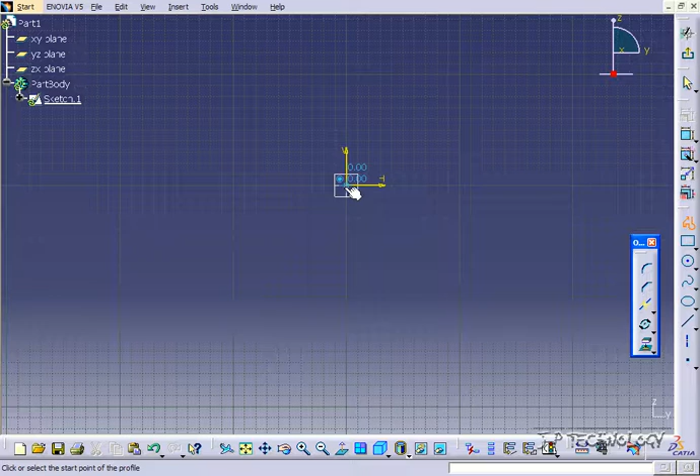Now I'm going to show you how to rotate your sketch within CATIA V5, and again, the reasoning behind this would be if you have a very complicated sketch and you need to rotate it a little bit, rather than redoing your entire sketch, you're able just to rotate it and shift it. So I'm going to draw out a profile. I'm just going to draw it out from the center point and just end it there.

To rotate, you'll find it in this toolbar along with the translate and the scale. You can also find it if you go to Insert, Operation, Transformation, and you'll find Rotate. With rotate, you're able to either select a single line or the entire sketch. What I'm going to do first is just do a single line. So let's click this line here and let's click rotate.

Now with rotate, again, you can make duplicate instances. So you can turn it on or off. In this case, we're going to make duplicate instances. So right now, let's just do one. What you have to do is select the origin where you're going to rotate around. In this case, we're going to use the origin of the sketch. So we'll click this point here.

And now you have to kind of just draw a line, and that's what it's prompting you to do. From this line, we're going to rotate around. The longer you make this line, the easier it is for you to manually move it around. The shorter it is, the harder it is to move it around, as it's going to be a lot quicker to change the value. So we'll make it just about the same length as the line we're going to rotate. And as you see, as we rotate, the part is also rotating.

So you're able to either rotate and snap to a point, or you can type in a value. This first one, let's snap it to a point. We'll snap it to this point here, and now we've duplicated that sketch there. Now press Ctrl Z, get rid of it, and we'll do another one. Click rotate, click that center point, go straight up, and this time let's key in 17 degrees. Click enter, and now it's moved 17 degrees.

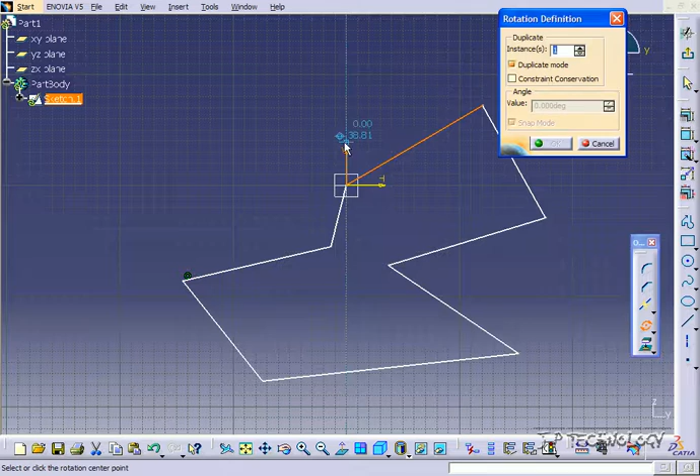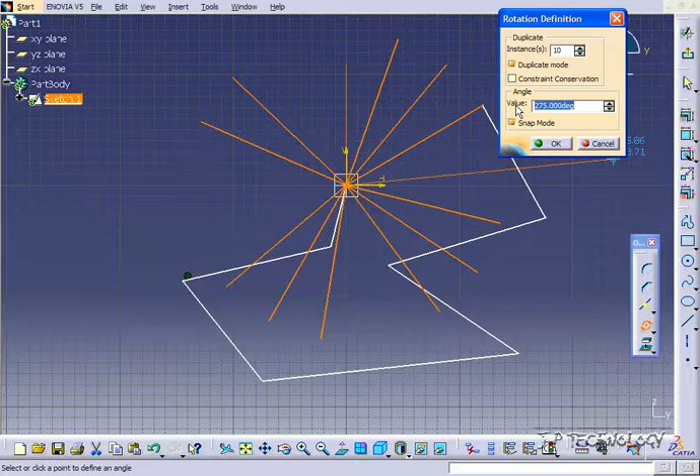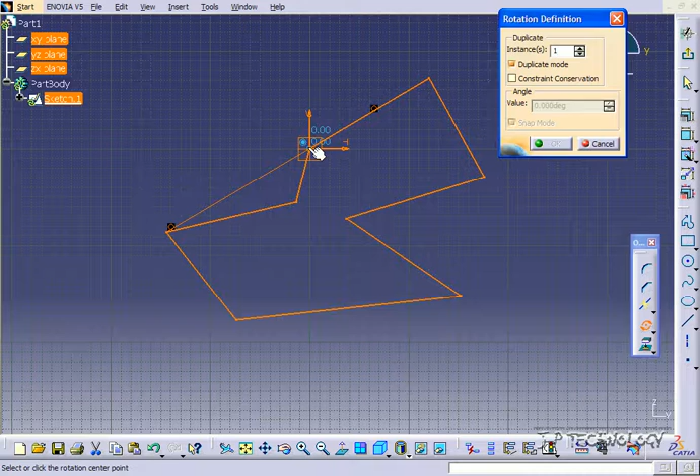Now we're going to rotate this entire sketch. So let's highlight the entire sketch, click rotate, and we're going to put it down to one instance. We're going to duplicate it, and we're going to do it around the center point. So bring it straight up, and we're able to rotate this around as such. Now let's put this to 90 degrees, click OK, and now we've rotated that entire sketch 90 degrees.

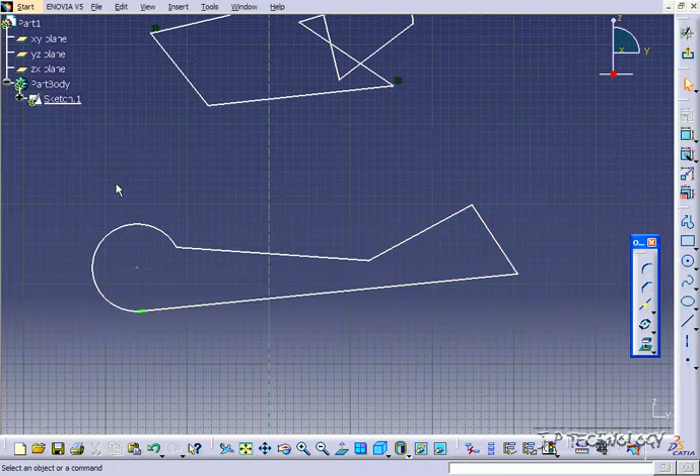Now let's draw another sketch down here. What we're going to do here is just rotate the sketch alone. So let's highlight the entire sketch, click rotate, and we're going to uncheck the duplicate. Now we're going to rotate it around this point here, and we're going to key in 90 degrees, click OK, and now our whole sketch is rotated 90 degrees.

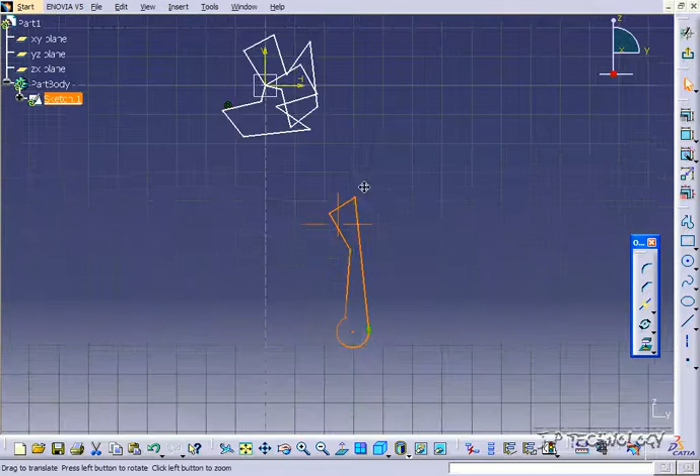Again, like I said, this is a great tool when you already have a sketch you like, but you need to just shift it or rotate it a little bit rather than going back and doing the whole sketch over with, say, a 5-degree shift. All you have to do is rotate using the 5-degree shift, and your whole sketch will rotate. And that concludes our tutorial on how to use the rotate sketch feature within CATIA V5.